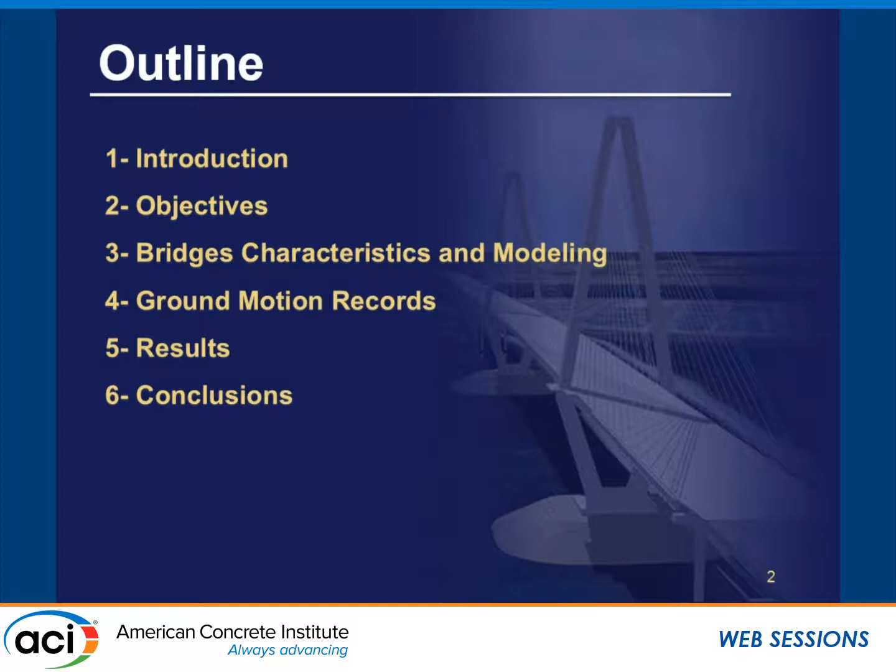During the first two presentations, you have already been introduced to performance-based design for bridges. What are the objectives of our study here? The bridge that we are using and how we modeled it, the ground motion records that we used for all our fragility assessments, and some preliminary results and conclusions associated with these results.

So damping is the focus of the topic here. How do we model damping? Damping is, in general, one of the key characteristics of your analysis. If you use a wrong assumption for your damping, this definitely will affect the results. The most typical method for modeling damping is Rayleigh damping.

With Rayleigh damping, you're building a damping matrix that is mass proportional and stiffness proportional. Based on the assumption that you have, as we'll see in the next slide, you can have different effects. To calculate the Rayleigh damping coefficients, you need to identify two frequencies that you use.

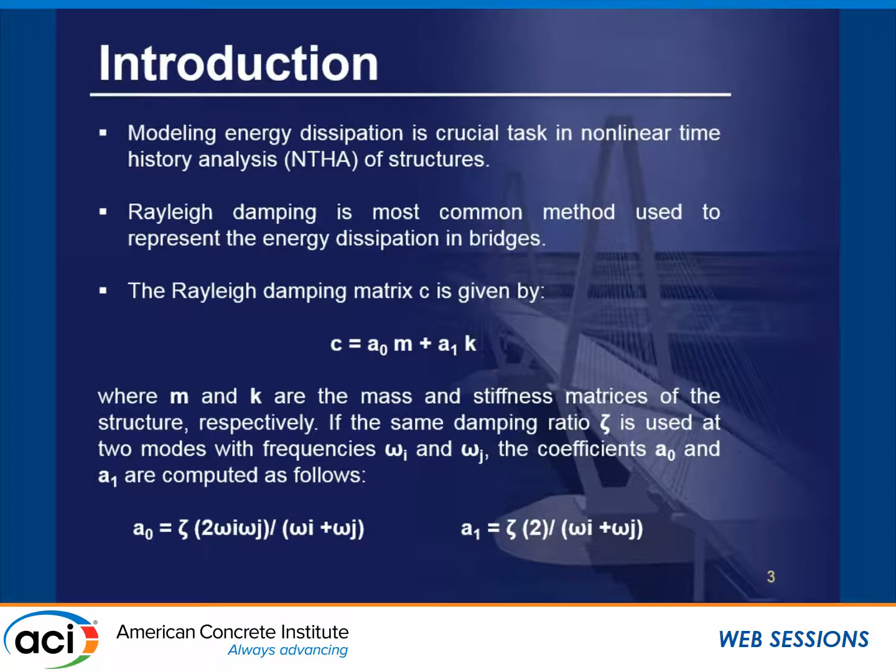These two frequencies can be the frequencies of the first two modes, or the first mode and the 10th mode. This is one of the parameters that we studied here, so I'll be talking about this later on. What you see in dash are the stiffness only proportional or the mass only proportional. The Rayleigh damping is the solid curve, which combines both.

Omega i and omega j are the two frequencies that you use to calculate your coefficients. So if you are using the first two modes, then all the higher modes will have way more damping than what you anticipated. So if you have a higher mode effect, which we will see in a few slides, you might be using a false damping force that's not necessarily reflecting the real thing.

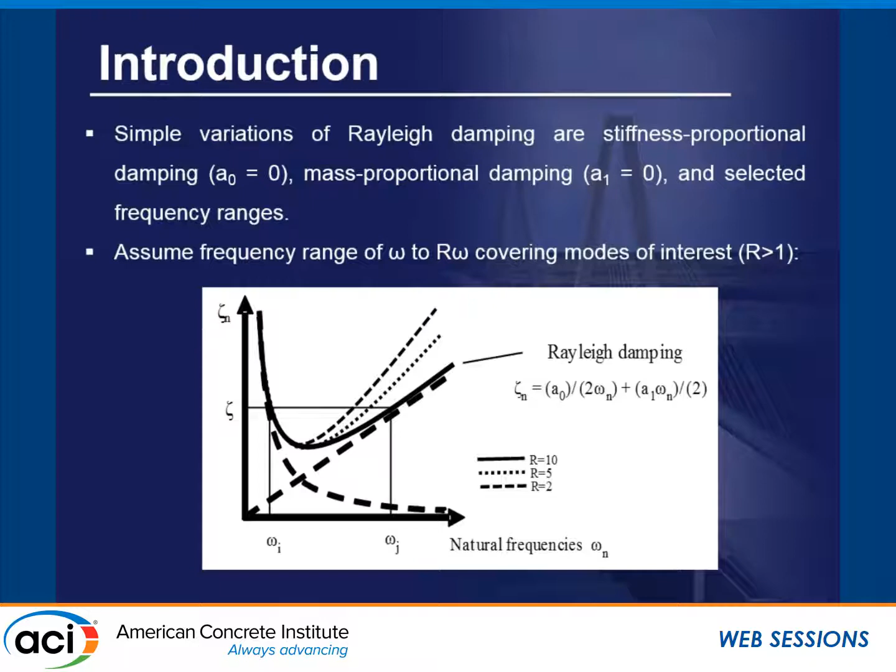So these are the main characteristics of the Rayleigh damping, whether you want to be mass only proportional or stiffness only proportional, or which modes you use basically in calculating the damping coefficient. These are the three things that we are studying here.

So if there is such assumption, why Rayleigh damping is still so appealing? It's actually very easy. You don't really need to build a whole new matrix. You just use basically your existing stiffness matrix and existing mass matrix. And what people have been doing in the building side of research, they have been trying to identify damping. Maybe they did a little bit more work on this than what we have been doing in bridge engineering.

So some recommendations to avoid false damping forces, for example, is just to eliminate the mass proportional part and just go with the stiffness proportional part of the damping. So these are the sort of things that we are studying or looking at here. So, to the best of our knowledge, we don't really have a very solid guideline. If you want to do nonlinear time history analysis for your bridges, how would you model your damping?

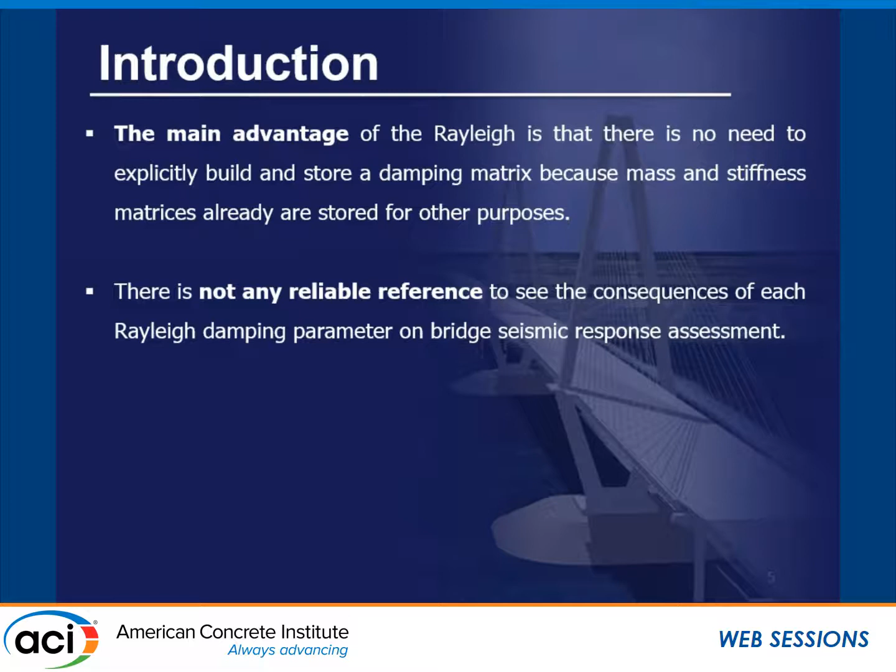The typical, using Rayleigh damping, was 5% damping. Just use maybe the first two modes to calculate the coefficients. Maybe this is a typical assumption. How this assumption might lead to different results if you vary any of these parameters. So since there is no guideline or solid reference, same thing for buildings also, most of the damping modeling guidelines are just subjective, so you can adopt them, or you can just use a different assumption.

So what we are trying to do here eventually is to have some sort of a reference, and if not a reference that gives you a recommendation for what model to use for damping, at least to know what are the consequences. If you are using 5% damping versus 2% damping, what you should expect in terms of the final product, which in this particular case is the fragility curves. How would your fragility curves be affected based on your modeling assumptions? So that's what we are trying to provide here.

Again, not a guideline on what's correct and what's wrong in modeling damping. That's not our objective. The objective is just to, based on the consequences, show you the effects, and it will be a reference for the designers or the engineers to eventually make a decision based on what they can observe from a study like this.

We will also see the recommendations that we receive all the time from the buildings industry, in terms of eliminating the mass proportional part of damping, or using a tangent versus an initial stiffness. As we have seen in the previous slide, a key component of the Rayleigh damping is the stiffness proportional part. So what type of stiffness matrix should you use here? Is it the initial stiffness or the tangent stiffness? These also lead to different consequences, and many of the building studies recommended, in some cases, to use the tangent stiffness, not the initial one. So we are also looking at the differences here.

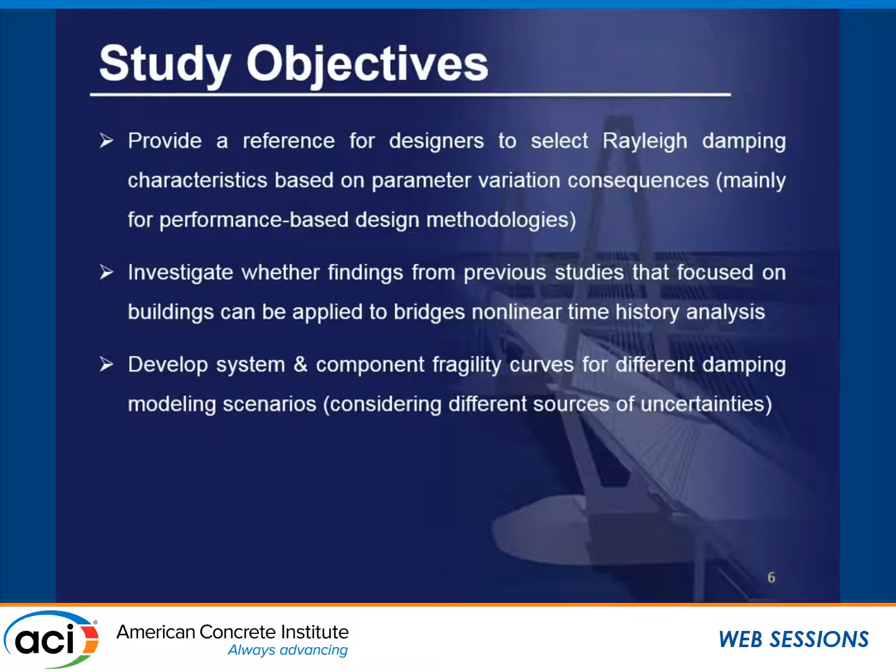And the last thing is to look at this at the system level and the component level. So not only at the overall fragility curve of a particular bridge, but we are also breaking it into primary components and secondary components, and see how each of these components is more sensitive or less sensitive to the damping assumption.

So what we are doing here is a pure analytical study. We are doing a whole bunch of analyses to get some fragility curves. For the damping modeling assumptions that we are varying here, we have 4 different scenarios. If you're just doing Rayleigh damping, and Rayleigh in this context means both the mass component and the stiffness component, but using the initial stiffness, or if you use Rayleigh damping with tangent stiffness.

And the second type, which will lead to the third and fourth cases, is basically if you eliminate the mass contribution and just go with the stiffness proportional part of damping, again with an initial stiffness or a tangent stiffness. So these are the 4 scenarios that we are studying here.

For each scenario, we have studied 3 different damping ratios, 2%, 5%, and even 10%. In some cases, some DOTs like Caltrans, for some configurations, maybe to account for the extra damping or energy dissipation at the abutments from the soil, can allow you to use up to 10%. So this is, of course, very few cases, but at least we wanted to study also how this would make a difference.

And the last thing that we studied is what are the 2 frequencies that you use to set up or to lock your Rayleigh damping coefficients early on. Are you using only the first 2 modes, or maybe the first mode and the 10th mode? So these, again, we looked at.

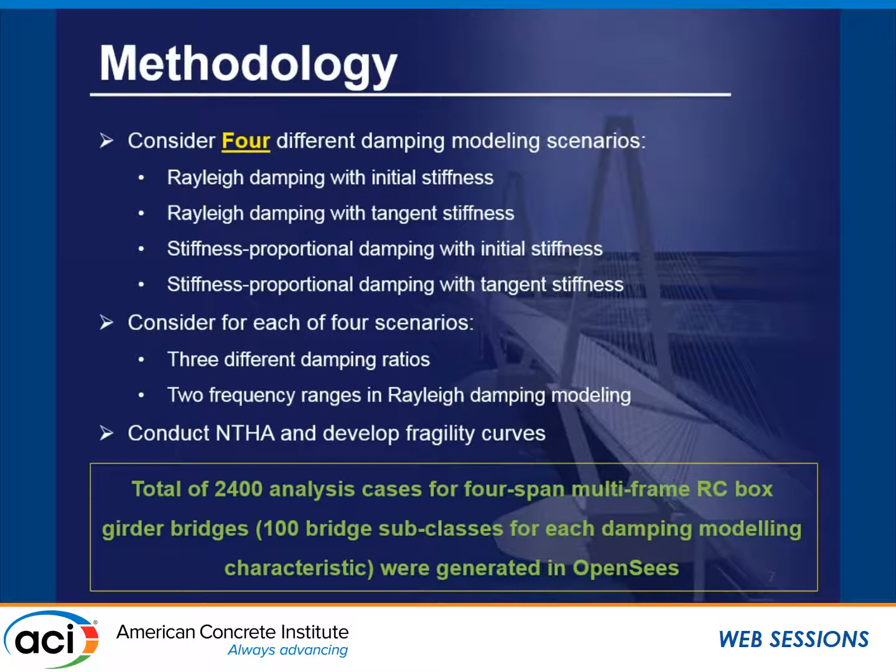Eventually, what we are doing is nonlinear time history analysis and developing fragility curves. So this is for 100 bridge cases that we have, and of course that's the probabilistic nature of things: we are varying randomly the parameters of the bridge to some extent and randomly matching it with 100 ground motions. So every ground motion is randomly paired with a bridge model, and we have been doing this for 24 cases for damping. So we ended up with 2,400 analysis cases that I will be showing the results of briefly here.

So the bridges that we are looking at are mainly older types of bridges. Our assumption here is that the important applications or current needs for performance-based design for bridges would be running an assessment of existing bridges. So if we want to make a retrofit decision, maybe instead of just going back and checking the force-based design or a displacement-based design, you can run it through a whole performance-based design framework to see how you would make your retrofit decision. So accordingly, we prefer to go with slightly older types of bridges, not recent ones.

So the bridges that we are using here are mainly from the pre-Northridge era. For those who are familiar with bridge engineering here in the US, of course most of you, I'm assuming, are familiar with this. Northridge was one of these key events that changed our design codes significantly. So what we are doing here is the pre-Northridge era, where the design was not as evolved as now.

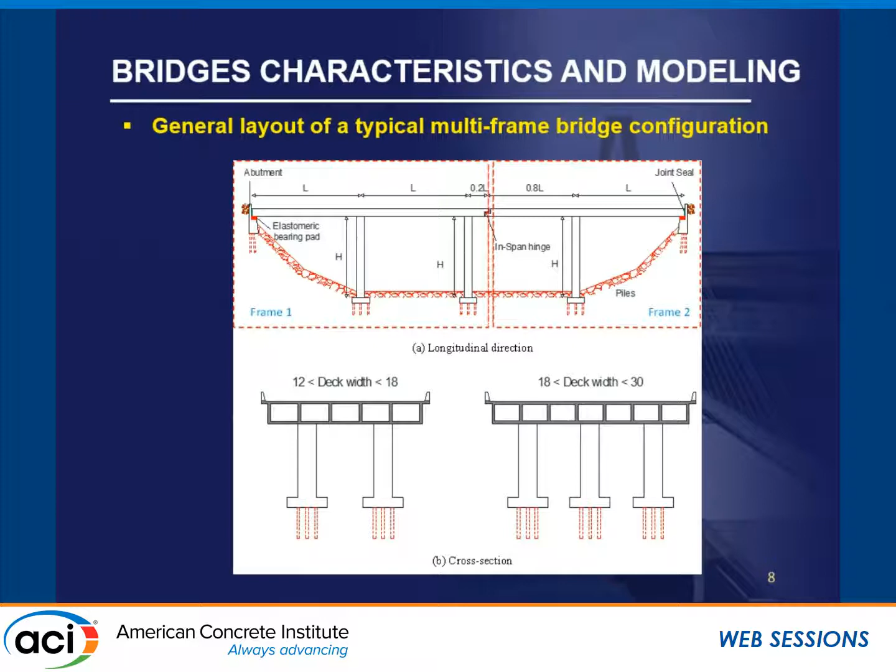And what we looked at is a particular type of bridge, which is the multi-frame. Also, we are looking at both system and components. So to make sure that we capture critical components, we use the multi-frame bridge configuration, not a single frame. And by multi-frame here, we mean you have at least one in-span hinge. The in-span hinge will lead to two independent frames. So pounding at the in-span hinge and unseating at the in-span hinge are some of the possible damage scenarios that we are considering here.

Just again, some more information about the bridge characteristics. It's a 4-span multi-frame bridge with one in-span hinge that we are using in this case. This is the pre-1971 design era for the bridges that we are using, and all the other things evolve accordingly. The overlap lengths at the deck, at the abutment, at the in-span hinge, all these evolve accordingly. And here we also have some more information, like the pile caps and the soil that we modeled, which we'll show in the next slide.

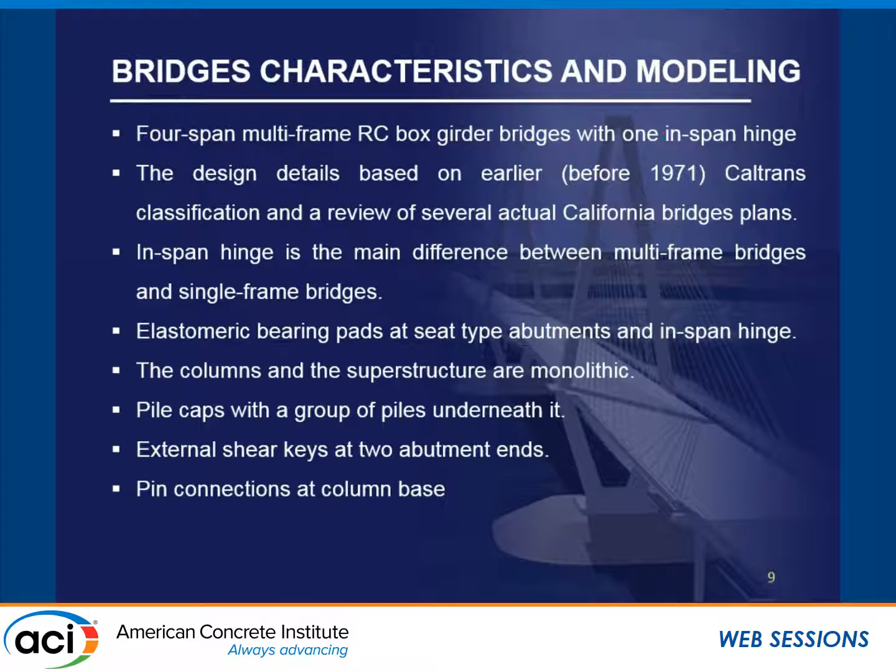So we try to be comprehensive in terms of all the components that might fail. Again, we are looking at both a system fragility and component fragility. So we wanted to capture as many components as we can here.

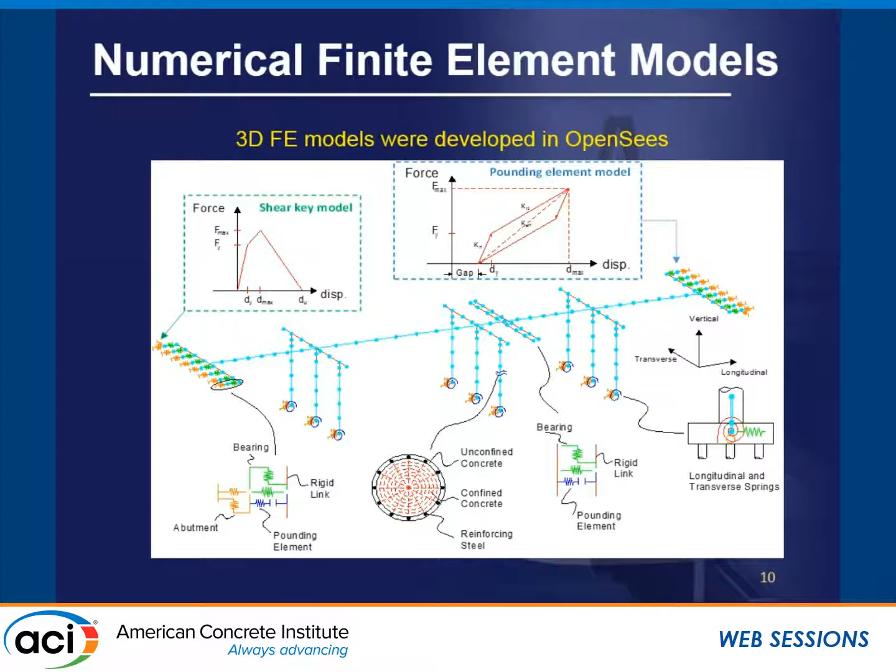So this was the bridge, and just going back one slide again, I'm sorry. You have the configuration for the bridge, but we still randomly vary some of the parameters, how many columns you use per pier, the spans. These are the random variables that we use. This is a typical configuration, but we were able to generate 100 different bridges out of this configuration. For these 100 bridges, each bridge was randomly paired with another 100 ground motions.

So the 100 ground motions that we used for this analysis were selected from the PEER, the Pacific Earthquake Engineering Research Center database, which is getting very popular now, especially in California. We're here in California, actually. So most of the studies in California are using this database for all their ground motions.

20 particular ground motions out of these are near fault, so that we account for the pulse and pulse-like ground motions. Our selection criteria is just to choose shallow crustal earthquakes. Again, every time you change your set of ground motions, you can have different results, but we just try to select something that's typical, or at least representative of a typical California bridge. This was our objective here. So again, these are some of the variables that we changed for the ground motion selections.

The vertical component, I have to mention this because this is one of the most popular topics that people always ask: did you include the vertical ground motion effects? In this study, we didn't. So we are just using biaxial, the X and Y components of earthquakes.

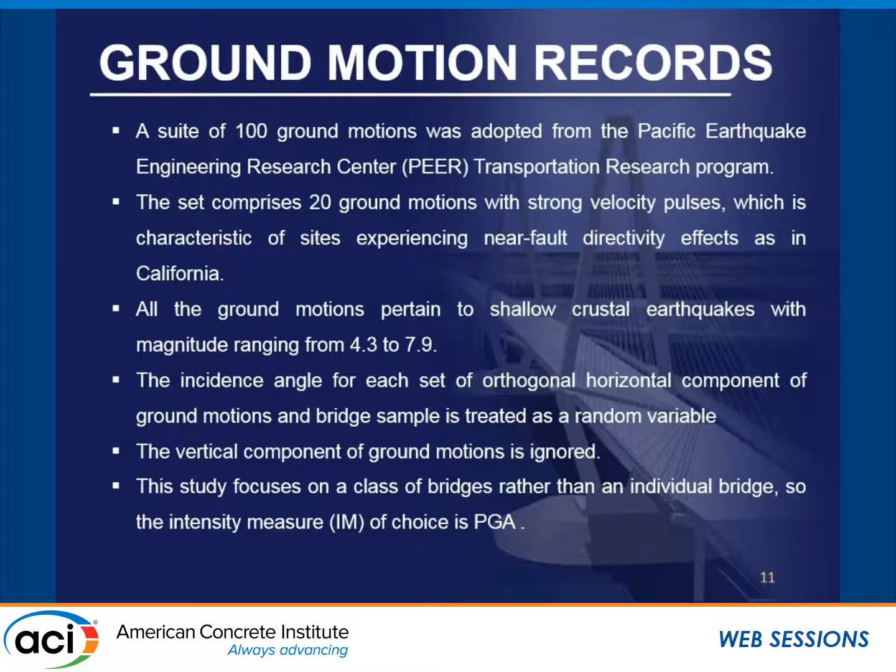So starting with some results, I jumped right away to the fragility. We are doing the nonlinear time history analysis, but eventually for each case we get the damages, we arrange the damages, we fit a lognormal distribution to get our fragility curves here. So what I'll be showing is mainly the fragility curves, the products that we are after, and see how these fragility curves are sensitive to the different damping characteristics.

So 3 things that we are looking at: the effect of the frequency range, and by the frequency range, I mean which 2 values you used for your frequency as part of calculating the Rayleigh damping coefficients. Are you just using the first 2 modes, or the first mode and the 10th mode? So these are the 2 different things that we choose here. Based on this selection, or based on the curve that we have seen early on, this is the range where you almost lock your damping ratio at the value that you choose. So if you want Rayleigh damping for a 5% damping, this 5% damping pretty much will be just between these 2 frequencies that you choose.

Before this, you don't care, it's out of the range, but after this, especially for the higher modes, if you remember, the curve is shooting up. So outside this range, if you wish to look at 5%, higher modes, if you're not accounting for this, might shoot up to 10%, 20% damping. So you are even using false, or spurious-like damping forces.

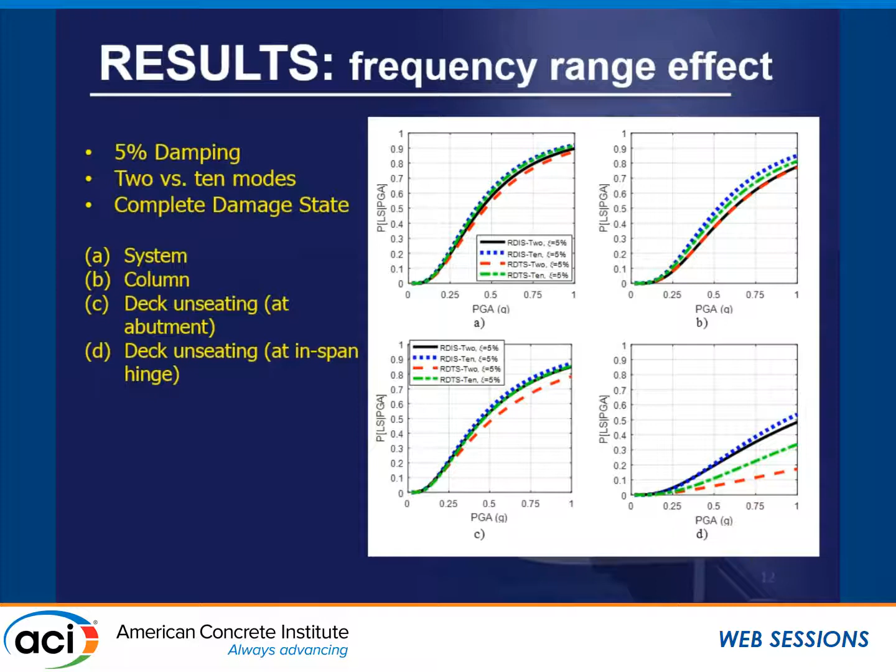But now with the newer codes and the newer guidelines, this has been resolved. So we still don't know, if we are using a new code, whether the overlap that we provide at the seat, at the abutment or at the in-span hinge, is enough or not. That's a part of the study. I'm not showing it here, but it's part of the study as well to look at the newer codes. But we can see here that deck unseating is very sensitive to damping, and in the overall scheme of things, it's also the most vulnerable component here.

We did the same thing for the secondary components. Going back to Dr. Al-Lam's presentation, you have seen that we usually define damage states, or the target objectives for your performance. So we have a slight damage state, a moderate damage state, a complete damage state, and so on. For the system and the primary components, these are the components that are designed to fail, where you lump all your ductility, like the columns. So primary components would usually go all the way to a complete collapse or a complete damage state.

However, for the secondary components that we considered here, like yielding in the soil and rotation at the foundation, we are not expecting, or actually not allowing, our bridges to fail in these modes. So what we would experience here would be just a slight or a moderate damage state. We are not expecting to see a complete or severe damage state for these secondary components.

So the idea again is to get an insight into how our modeling characteristics will affect the fragilities for the different components. We can see some components are less sensitive than others. This one here, the displacement at the in-span hinge, is pretty much the most sensitive to the damping. And by the damping, I mean just 2 versus 10 modes here that I'm showing.

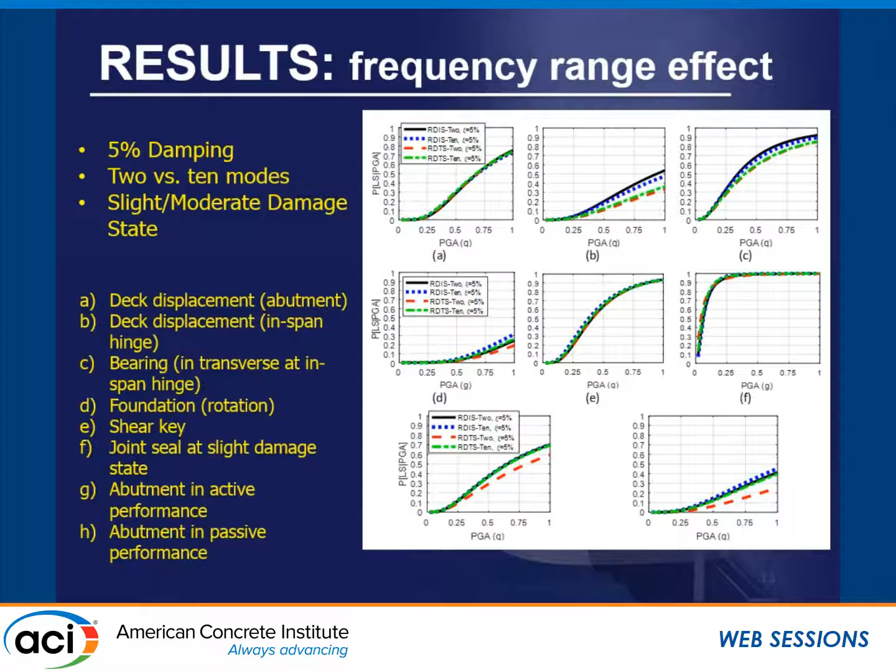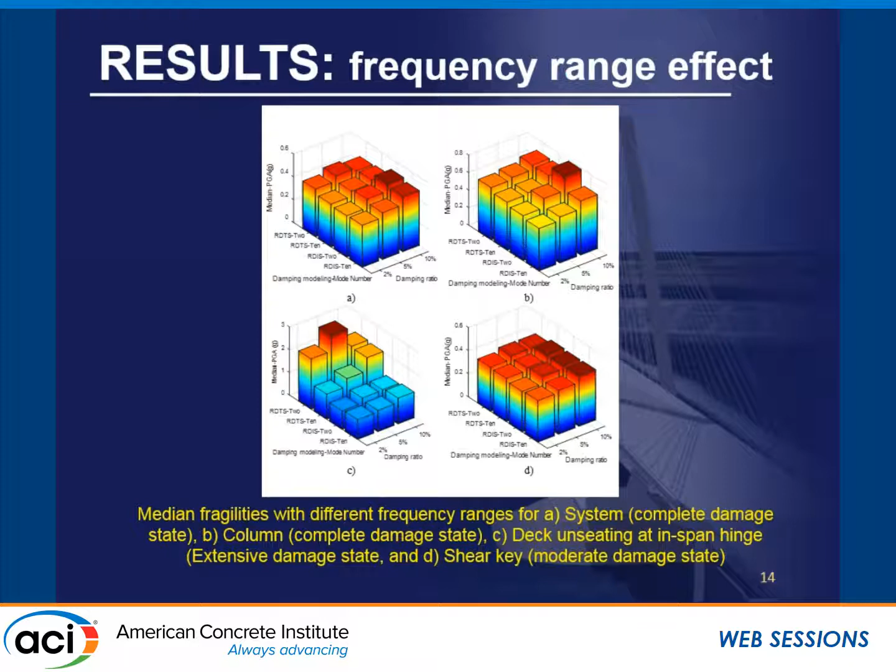But when you go to subplot C, which is the deck unseating, you can see that the median fragility, which expresses how vulnerable your component is, shows very large variations when you change this particular damping characteristic, which is using 2 modes versus 10 modes in calculating your damping coefficients.

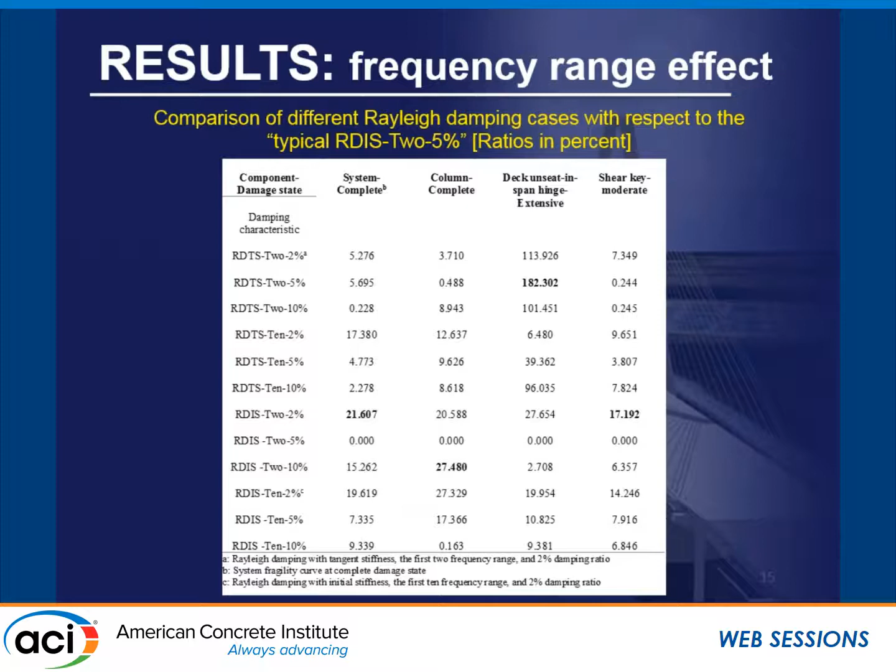So you might just go with a completely different response just by using this damping assumption or a different one for the deck unseating. The other thing that we looked at is the effect of the mass proportional damping. So if we just run, again, the same analysis, but using only the stiffness proportional part of the matrix. Why are we doing this?

As I mentioned earlier, these are recommendations that people developed mostly from the building industry, not from the bridge industry, but in the building industry, a lot of recommendations came that to avoid the spurious or false damping forces or extra damping forces that you don't need, it's better to go with the stiffness proportional. There is no physical underlying meaning for most of these damping assumptions anyways, but we just try to see what would be the effect if we ignore the mass contribution.

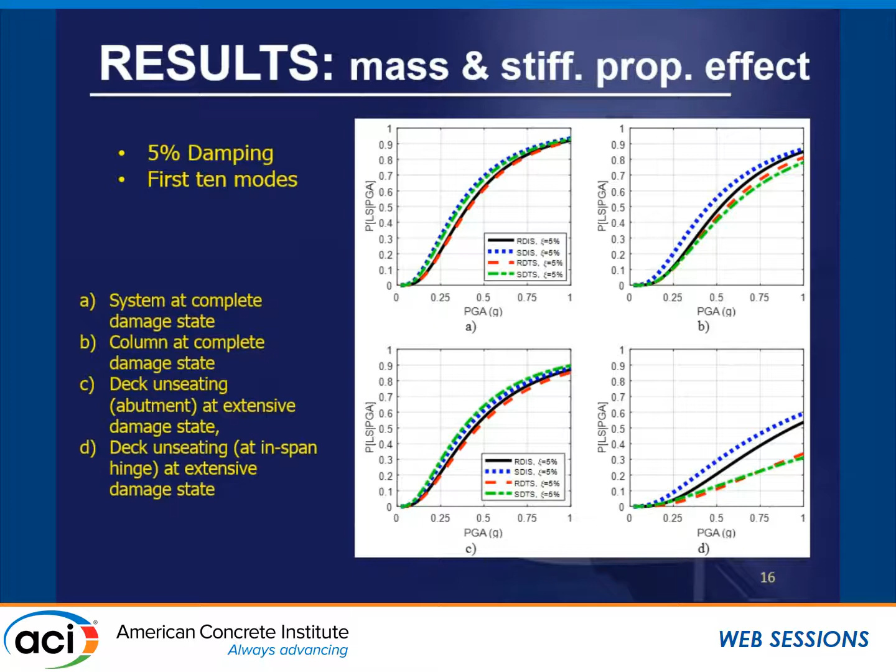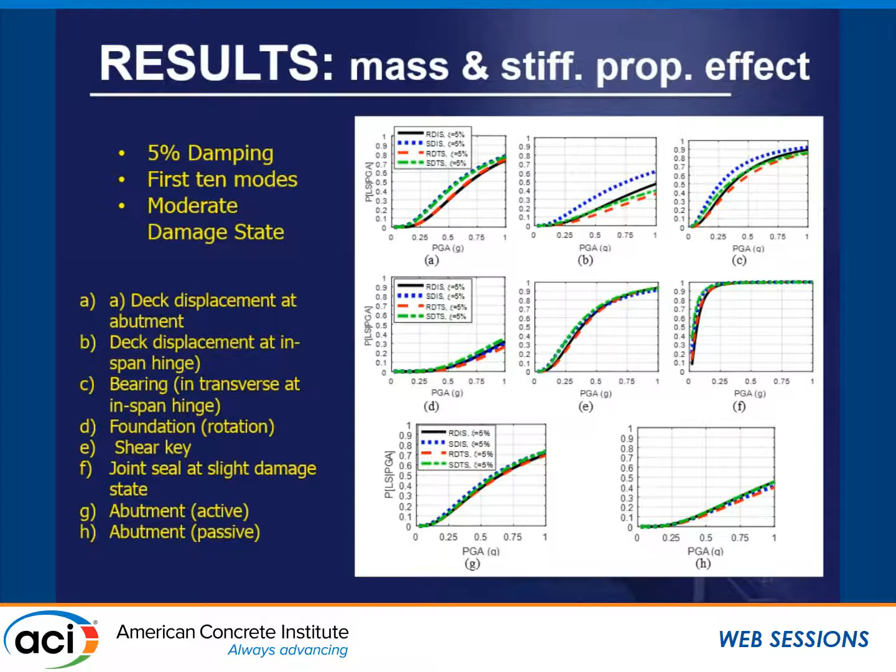So we see again that the system is somehow changing the system fragilities, but not as much as you would see in the deck unseating, for example. These are the secondary components, and we see now that some secondary components are even less sensitive, but the displacement, for example, is the only one that is pretty much sensitive to ignoring the mass proportional part of damping. The last thing we looked at is the 2%, 5%, and 10%.

So again, these values are just recommendations. We know that damping is not something that you just go and calculate from the dimensions of your columns, for example. So why are you using 5%? This is the recommendation based on some system ID studies and a whole bunch of data that have been collected, and they came up with some recommendations: for reinforced concrete, use this much damping ratio, for steel, use this much. So there is still a range. With all these studies, there is still a wide range for the damping ratio that you would use.

Some would recommend 2% only for bridges because you don't really have several non-structural components that would dissipate energy as you would have in a building, like tall buildings with the windows and the facades and everything. The curtain walls dissipate more energy than what you typically have in bridges. So some recommendations, and again I say recommendations because there is nothing written or in code here, say that 2% would be appropriate to use for bridges.

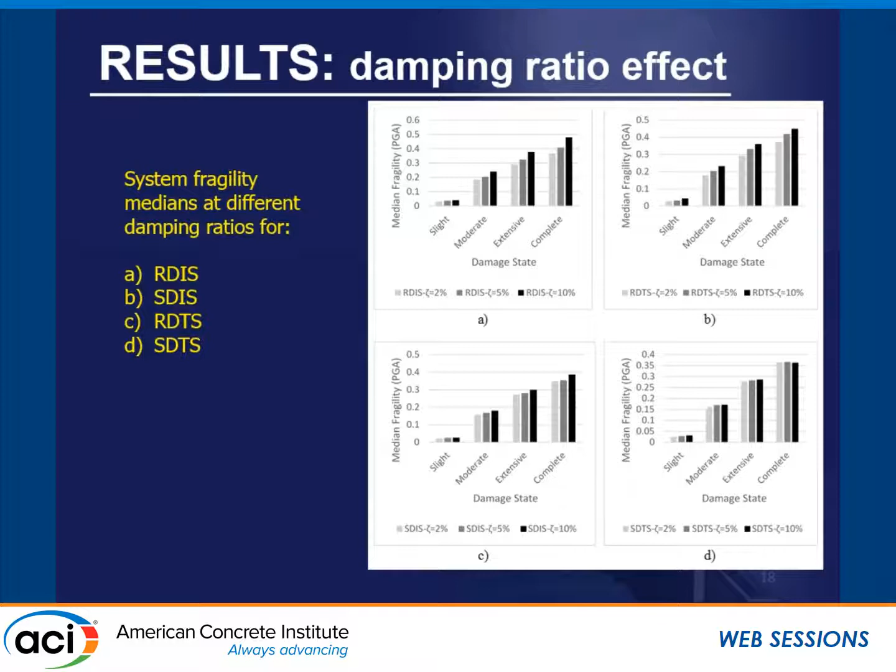So just to wrap up, these are some quick conclusions that we see here: in general, components and system fragilities have different sensitivity to changing the damping characteristics. So we have seen that the system, for example, is less sensitive than the deck unseating. Some other components are even less and less sensitive. So that's something we observed.

The higher mode effect was very particular, especially for the deck unseating; we observed almost 100% change just when using 2 or 10 modes in calculating your Rayleigh damping coefficient. So it's really important to know if you're expecting to have higher mode effects in your bridges; where higher modes of vibration are included, it's better to account for them when you are calculating the Rayleigh damping.

And this might sound obvious, but honestly, people might just overlook this because not everyone is going to pick the frequency of the 15th mode as part of calculating the Rayleigh damping coefficient. If you're using OpenSees, you use the default, maybe the first 2 modes, and that's it. So it's worth slowing down at this step and thinking a little bit. You can look at your modal analysis, how many modes you think are contributing, and calculate your damping coefficients accordingly.

The system fragility is more sensitive to ignoring the mass proportional than the components. Some components are less sensitive, which is good news, actually. And then the Rayleigh damping with initial stiffness versus the stiffness damping only with tangent stiffness: these are, in terms of ranking, the highest and the lowest sensitivity to changing the damping ratio. So if you decide to go with the Rayleigh damping with initial stiffness, you should be prepared that this is very sensitive to your modeling assumption. However, if you're using just the stiffness proportional damping, this is less sensitive.

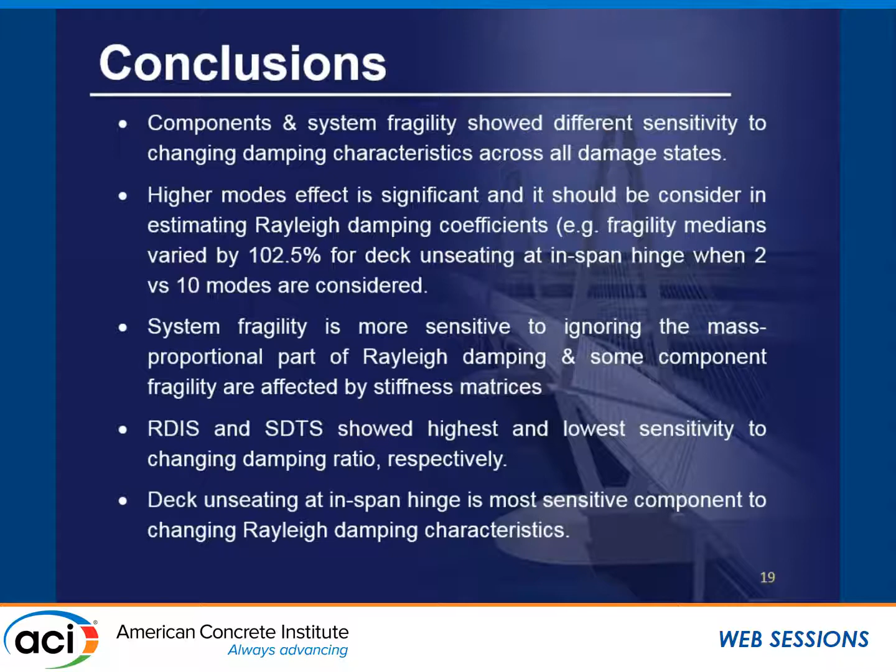So if you are doing a retrofit for an older bridge, and you decided to do a performance-based design, performance-based assessment or evaluation, and part of this will entail some nonlinear time history analysis, then you should be really focused on what you want to do for your damping, because your results will be very sensitive to this. So with this, I would like to thank you, and I'll be happy to answer any questions.

Mohamed, thanks very much for this nice presentation. So my question is, you have this Rayleigh damping, you're looking at a nonlinear time history analysis. So how generalizable do you think these results are if somebody would want to model a different bridge or use a different modeling approach? Because ultimately this is mass and stiffness proportional damping, right? Yes. So if you change completely the stiffness matrix or the mass matrix, which will depend on how you model your bridge, right? There's a lot of nonlinearity that you're presenting there at the soil level, between the two decks at the gap and so on.

So do you think these results are generalizable to other bridges, or if you were to use some other modeling approach? Thanks a lot for the interesting question. So what we are doing, actually, we just focus on one class of bridges. I agree, of course, that changing the bridge characteristics, or at least the type of the bridge, would change the mass and stiffness. But as part of our probabilistic framework, these 100 bridge models that we generated have different geometries and different spans, to account for the variation in the mass and the stiffness, but within this class of bridges.

So we didn't look into different materials, we didn't look into different types of bridges without, let's say, in-span hinges. But I agree, changing at least the broad class of bridge will lead to different observations. So before we go ahead and make a general observation here, and that's why this is just preliminary, we're looking at actually 4 different classes of bridges. The overall conclusion will hopefully be generalized based on different types of bridges, not only one type of bridge.